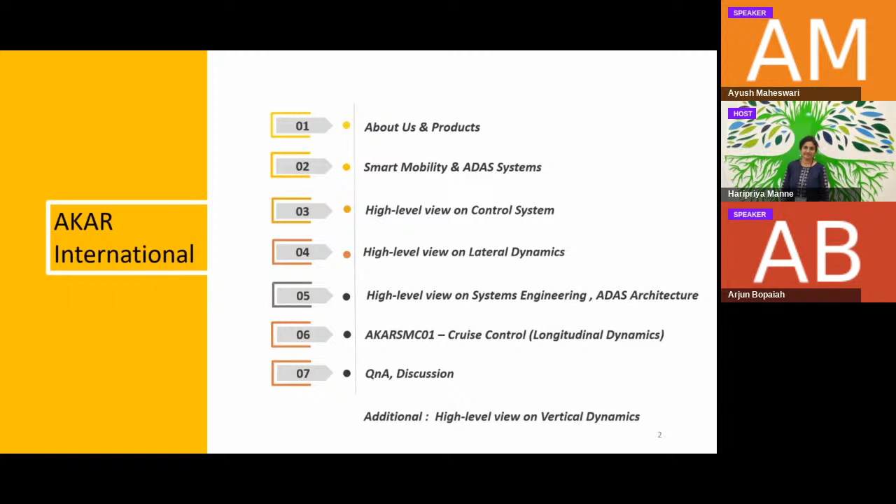In this webinar, we will first talk about our company, then about smart mobility and ADAS systems. Then I will give a high-level view on control systems, which is the core heart of designing ADAS algorithms, followed by a high-level view on lateral dynamics. Moving on, I will talk about system engineering and ADAS architecture, then showcase our product simulator on cruise control, which is already blended into our webinars and seminars. Then we will have discussion and open Q&A, and if time permits, I will also show a high-level view on vertical dynamics.

Talking about AKAR, it is a Singapore-based company co-founded in 2012. AKAR provides its products and services in two verticals. We started with fintech and software engineering as our first vertical, and our second vertical, started in 2017, is in the domain of automotive and smart mobility.

This webinar on smart mobility and ADAS system is presented by the AKAR team in collaboration with Andhra Pradesh State Skill Development Corporation, and I would like to thank them for giving us this platform to share our knowledge with all of you.

The presenters for today are me and Arjun. Unfortunately, Ram is not available today, so he will not be joining this seminar.

I did my master's in automotive mechatronics from Cranfield University. Earlier I worked with Honda R&D in the vehicle dynamics division, and after my master's I worked as a research and development staff member with Cranfield University. Arjun did his master's from Oxford Brookes University in automotive engineering, specializing in electric vehicles. Currently, we are both doing our professional doctorate in engineering in automotive systems design at Technical University Eindhoven, Netherlands.

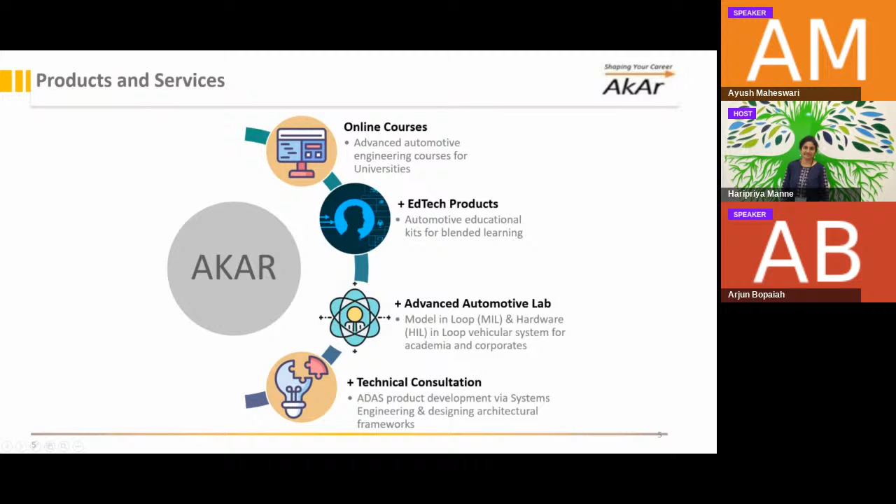This is one of our theoretical sample content of a 6-hour seminar where we focus upon control theory, vehicle dynamics, as well as ADAS development. We provide online courses covering basics starting from linear algebra and vibrations, eventually covering control theory and vehicle dynamics control, and finally ADAS architecture. This is our specific template for our online courses.

Along with our online courses, we are also developing simulators, which when blended with the online courses, allow you to perform various experiments based on what you are learning in parallel. Some of these experiments I will be presenting now.

Our first experiment is the cruise control system, developed with Unity Game Engine and MATLAB via wireless network. This system was developed by Arjun and Ram, and the subjects covered in this experimental bench are vehicle dynamics, control systems, state machines, and programming via C sharp, since the Unity Game Engine programming is done in C sharp.

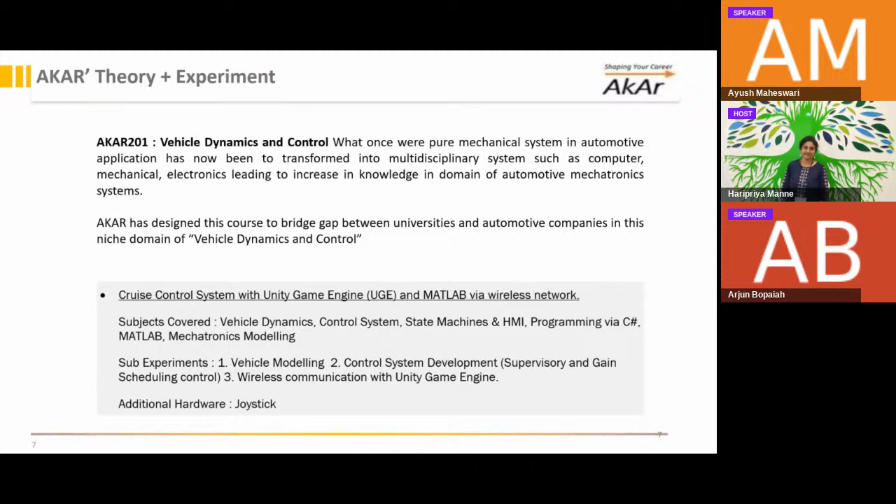Our other products include a vehicle trajectory controller, which you can control with a Logitech steering system. This is still in development, and again it is built using Unity Game Engine and MATLAB. Then we have our replay model for ride and handling control, covering ride comfort analysis, handling analysis, GUI interface development, and programming via MATLAB.

Our experiments and online courses try to provide specific knowledge in particular domains required for development of ADAS systems, whether you are working in a corporate setting or switching from university to corporate in the future.

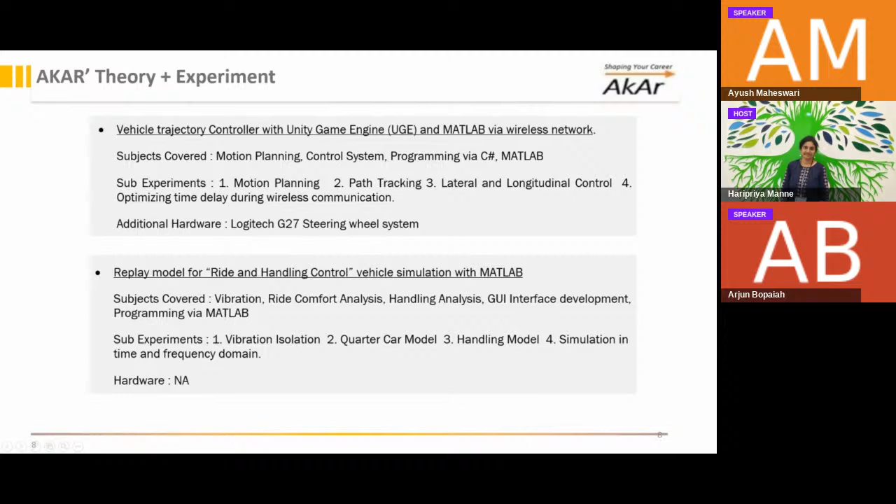In 2020, we collaborated with the Automotive Research Association of India, ARAI Academy, Ministry of Industries, and also collaborated with MathWorks India and ANSYS India this year. Our seminars this year were supported by MathWorks, and another seminar was supported by ANSYS.

Now I will start giving you a high-level idea of what smart mobility is and what exactly ADAS systems are.

Today, if we look at the bigger picture, many applications in today's world such as aerospace, robotics, automotive, and defense have developed smart systems attributed to the increasing power of computation. There has been quite an industrial revolution now when we say Industry 4.0, used interchangeably with the fourth industrial revolution, representing a new stage in the organization and control of the industrial value chain.

Industry 4.0 is comprised of cyber physical systems developed from multidisciplinary domains, and they form the basis of our smart machines. They use modern control systems, embedded software systems, Internet of Things, machine learning, etc.

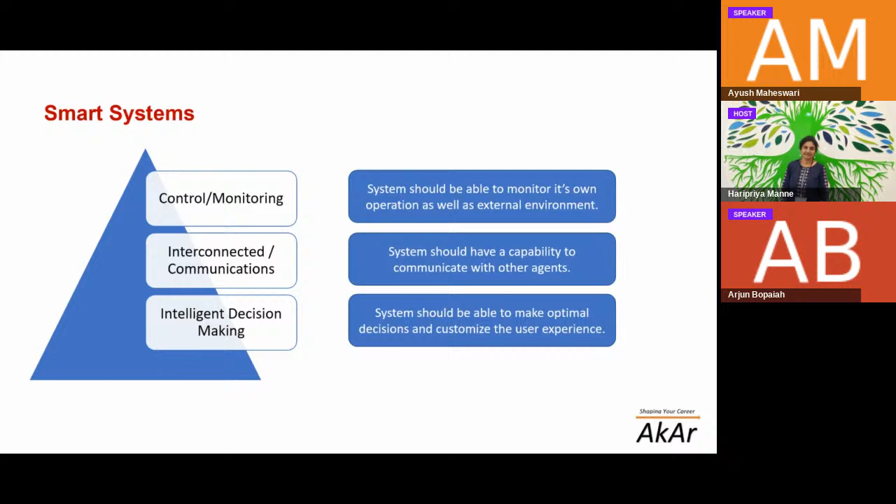A particular smart system can vary across various levels. A simple smart system can have just the control and monitoring attribute, while a fully developed smart system can have all three attributes. We try to use technology to embed all these attributes into a particular system.

Now, when we talk about automotive domain, smart systems in the automotive domain, we need to define the various levels. These levels are defined using SAE Taxonomy, defined by SAE J3016 level of driving automation. This chart offers more consumer-friendly terms and definitions for the levels frequently referred to by industry media. This infographic helps eliminate confusion and provides more clarity across the automotive community, and helps standardize the framework across global automotive companies, giving engineers and developers a benchmark and scope for their development.

So there are 6 levels of automation, starting from level 0 going till level 5. Here we have what the human can do at each level and what the intelligent vehicle controller can do, and how they optimize decision making between the human driver and the intelligent vehicle controller.

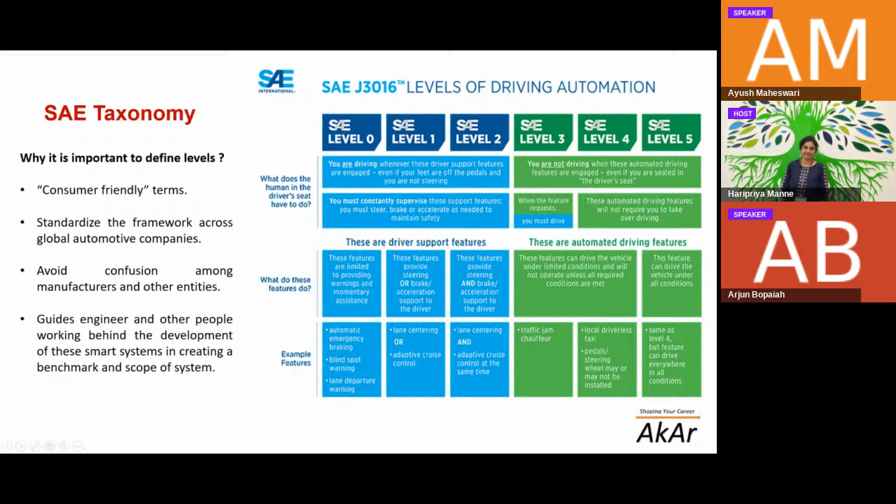Now, as we have seen what smart systems are and what the levels of complexity in these smart systems are, how should I decide at what particular point I need to stop? What should be my abstraction level? So there are various attributes.

One is the demographic and the customer base. What exactly is the requirement from the customer end? Then, what is the system developer's knowledge? If there is a lack of domain knowledge, you will not be able to develop a fully functional smart system. Then, the competitive positioning of a particular OEM which is designing this smart system, and of course, the country's infrastructure.

As we have seen earlier, a smart system also has an attribute of intelligent vehicle communication. So if we want our vehicle to communicate with infrastructure, then the country's infrastructure should also support it.

So here I have taken an example from agro tech. I have a particular conventional tractor and I want to make it a smart system. So first, I am putting a controller design into it and trying to perform maneuvering from the intelligent vehicle controller. It may be lane changing or cruise control, depending upon the requirement of the OEM. Then, on the third level, I also wanted to connect it with my smartphone.

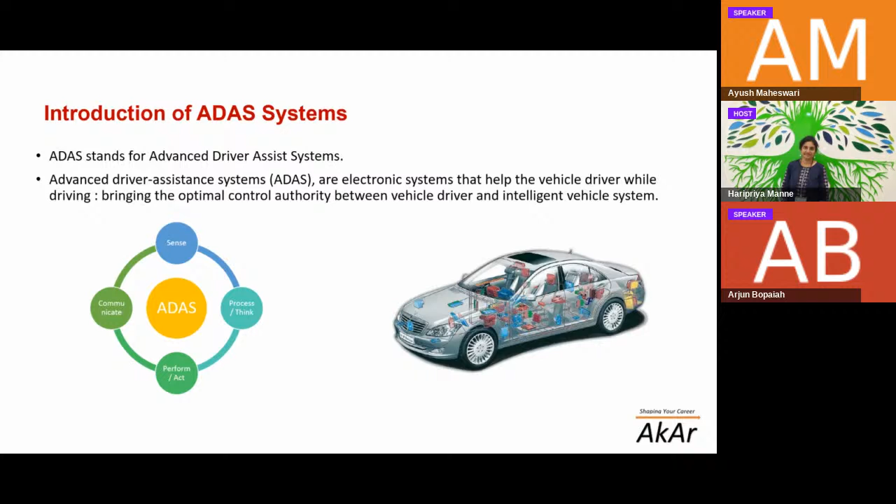When I talk about the need for ADAS systems today, or the need for smart mobility, we can see in India that a lot of work has been done by government on electrification and hybridization, and they aim to achieve electric vehicles on roads by 2030, and they're also developing the infrastructure for that. But right now, smart mobility is not much focused, though it will be a focus in the upcoming future.

Hence, we need to first find what is the need for ADAS systems. We can see that across the globe, there are peak hours spent in congestion during traffic, and the congestion index rate is also quite high. In India too, the traffic is not seamless in metro cities like Delhi or Mumbai, and smart mobility can help us achieve that.

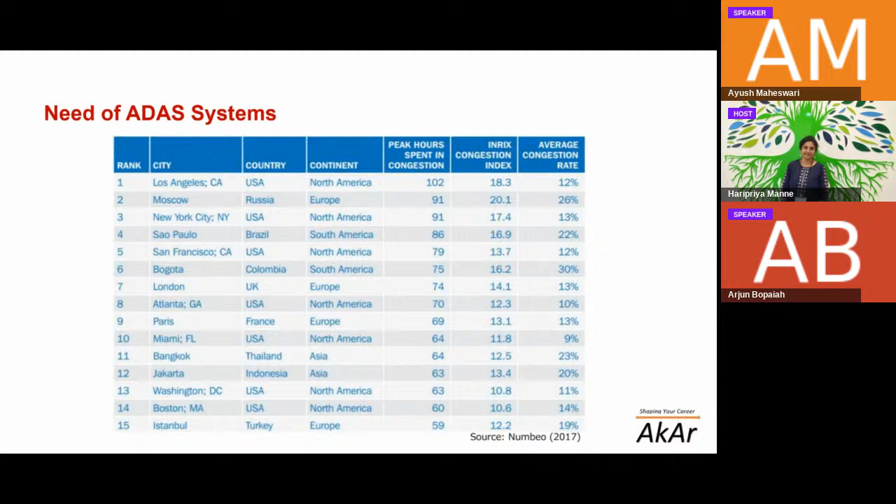Now I will talk about how OEMs are focusing upon ADAS technology across the globe. We know that driving is quite a complicated task, which requires significant level of expertise and experience. A lot of research focus is also put into making this fully autonomous vehicle navigate in complex and challenging driving scenarios.

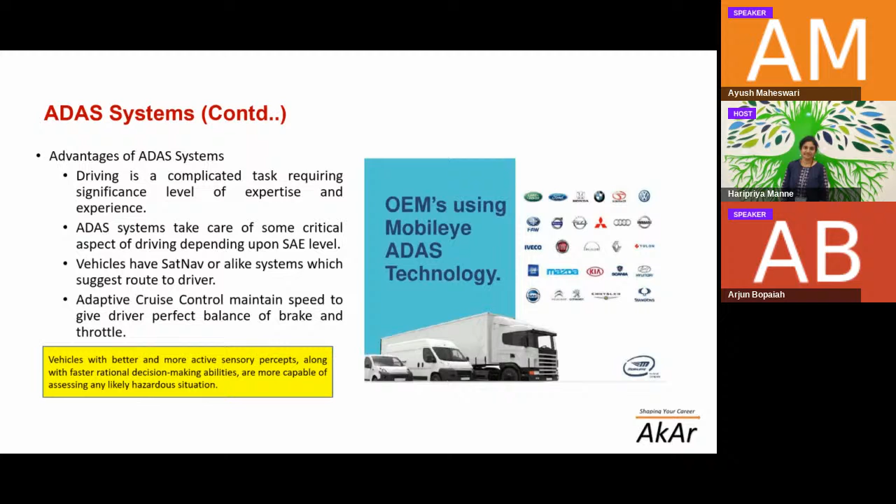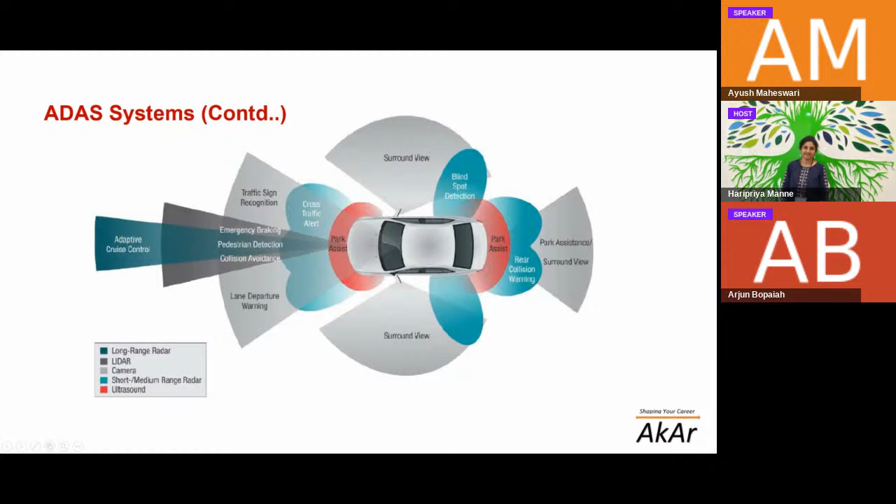First we need to understand the pipeline, the flow of the ADAS system architecture. The primary components in an ADAS system are sensors, processors, actuators, and software algorithms. Other features can of course be added over these components to make it a much more complex system, providing high comfort to the user.

Sensors will first perceive the external data. They will send that data to the software algorithm. Based on the software algorithm running on the processor, it will make some decision and send those commands to the actuator. Then the actuator will perform a particular action and will also inform the human driver. And then we can have secondary components like connectivity, where you can have vehicle to vehicle communication or vehicle to infrastructure communication.

You can store your data into the data cloud, and use that data further to study your driving statistics. And then there is middleware. If there are a lot of ADAS algorithms running in the system, and if they are dependent upon each other with high dependency between them, then middleware is used to basically perform a seamless integration between these software algorithms.

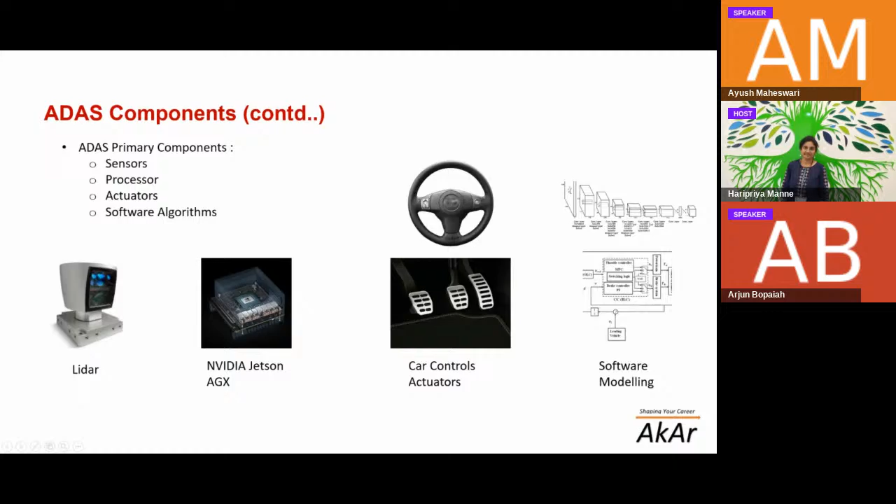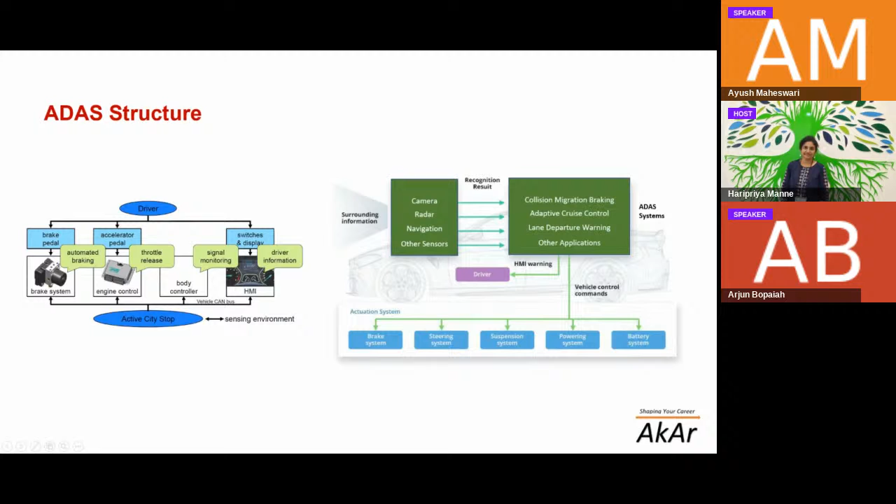When we talk about ADAS verticals, there are many verticals, and it's up to you which one you want to choose. In each vertical, you need multidisciplinary knowledge: vehicle dynamics and control, power electronics, computer vision and image processing, machine learning, deep learning, embedded systems, human-machine interface, software architecture, and some other verticals. It's up to you which domain you want to enter. Eventually, when working in a company, you will work in an integrated environment between these verticals.

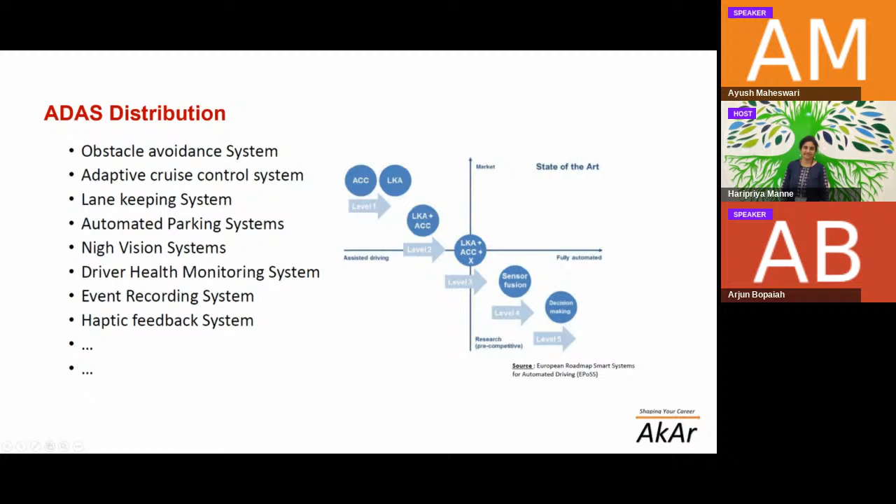Now I will give a quick recap. We started with Industry 4.0 smart systems, then moved towards ADAS systems, which are smart in the automotive world, and talked about the importance of ADAS systems. Now I will talk about the particular domains required to have good knowledge of ADAS systems so that you have the capability to develop ADAS algorithms.

If we talk about monitoring, which is one of the important attributes of a smart system, we talk about control engineering. Control engineering helps in monitoring my reference input, and it not only maintains the reference variable at the required values, but also follows its changes.

For example, let's talk about cruise control, a much simpler example. I want my vehicle to drive at a constant speed of 70 km/h on the highway. So I can give authority to the intelligent vehicle controller where my reference input will go as 70 kmph, and based on my control algorithm, it will try to maintain that speed on the highway until a human takes back control. These control algorithms are further embedded in microprocessors and can provide better control and automation.

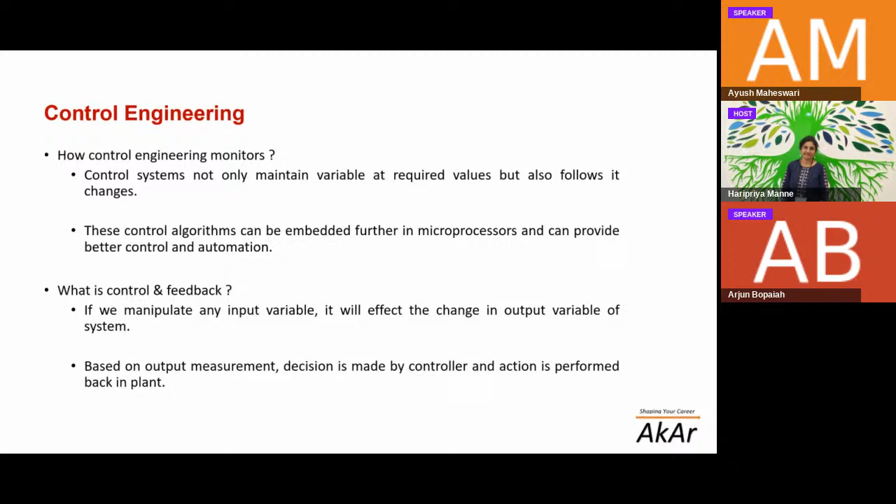Moving towards control engineering, there are two major divisions: classical and modern, and they have direct implications on control engineering applications. In classical control theory, my scope is limited to single input and single output design systems, and the system analysis is carried out in the time domain using differential equations and in the complex S domain with Laplace transform. If you are from a mechanical background and doing your bachelor's, I suppose you would not have studied much control engineering. I will cover a high-level view of control engineering so that you can understand its important aspects. Since this is a webinar, I can't go into in-depth detail. PID closed loop is one of the common classical control theory architectures.

Now, when we talk about modern control theory, we can deal with multiple input and multiple output systems. The systems are represented in terms of time domain, so I have various ordinary differential equations which I decompose into first-order ordinary differential equations and write my system in the state space analysis using state variables. All the systems here can have a multiple input and multiple output design. Further in modern control theory, you have various subdivisions: nonlinear control theory, multivariable control theory, adaptive control theory, and robust control theories.

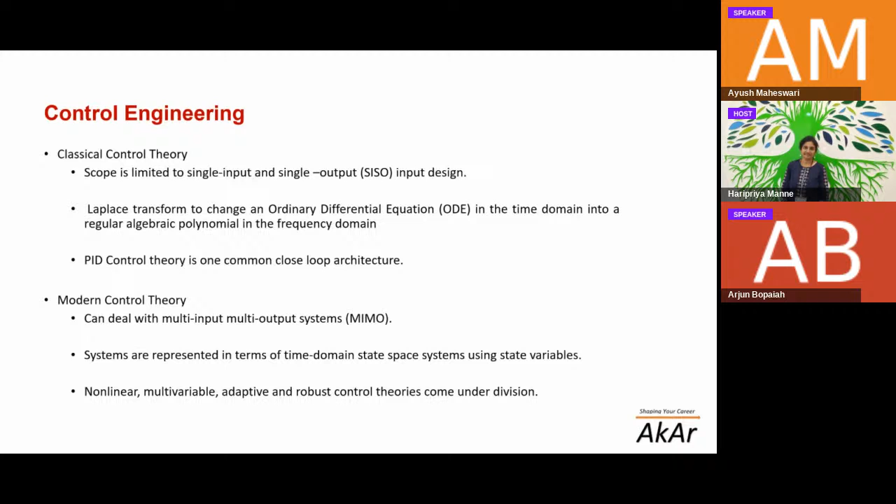So one of the most important things - some of you in the audience will be students who have participated in Baja or Formula Student teams. One of the most important weapons for race car teams is information. The more information a vehicle can gather and process, the better judgment and decision a driver can make. So university racing teams can use the concept of vehicle dynamics and control for their testing and data acquisition process.

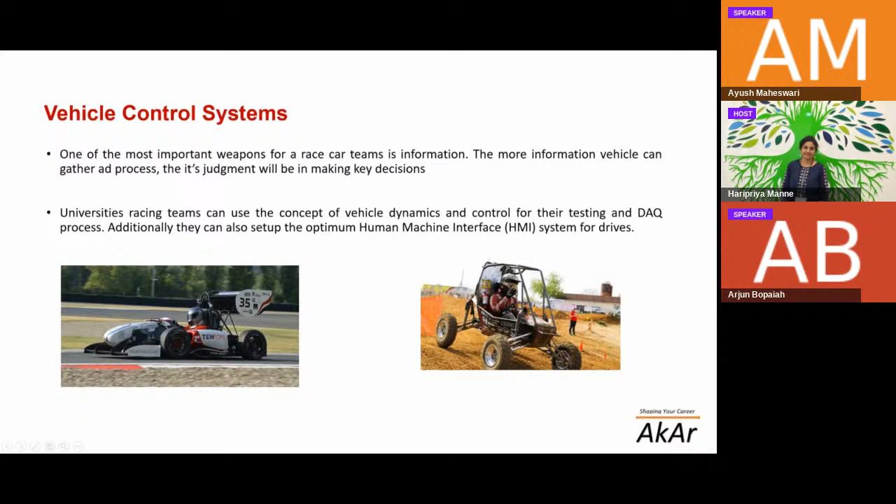With the better development of processor boards, they are now economical also. You can buy an NVIDIA processor board and also set up a very nice optimum human machine interface for the drivers.

So that was the control engineering aspect, which we were talking about in the monitoring part. Now we will talk about the plant model - what we are trying to control. We are trying to control a vehicle or plant, and to understand the vehicle or plant, we need to understand the vehicle dynamics. Vehicle dynamics plays quite a major role in development of these advanced driver assist systems.

It is further defined into three sub-levels: vertical dynamics, longitudinal, and lateral. If I see from a driver or layman point of view, he is not an engineer, so the terms we use are ride comfort. For example, if you are driving over a lot of perturbations on the road, then your comfort, depending upon your vehicle suspension design, will vary. So ride comfort is controlled by the vertical dynamics part. I will not talk about motion sickness because that is a bit out of the scope of this webinar.

Then we talk about longitudinal dynamics - the cruise control part and the adaptive cruise control part. And the lateral dynamics when we talk about maneuvering, handling, rollover, and when we are driving the vehicle at a very high speed, how stable is my vehicle. So these are some important terms you need to consider while designing the vehicle dynamics domain.

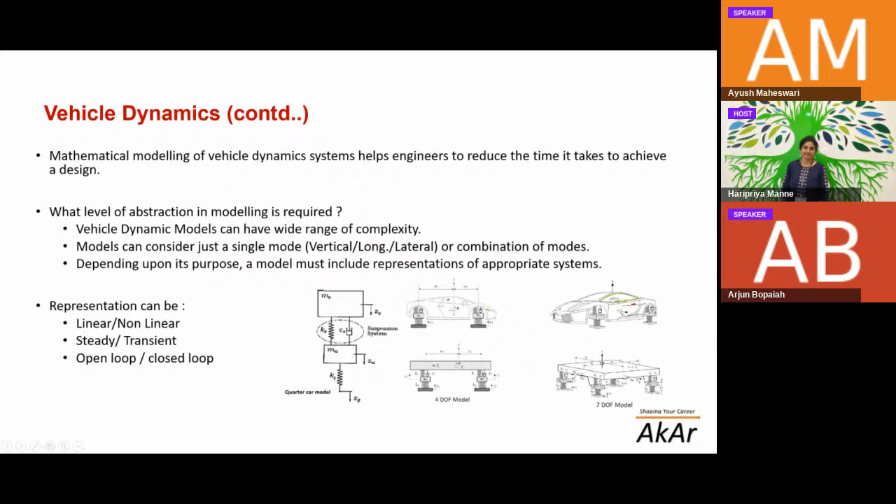Further, the representations can be linear or non-linear, steady or transient, and open loop or closed loop. So eventually my whole ADAS system is dependent upon my vehicle modeling and control theory.

Eventually you will see that if I calculate the stakeholder map of my ADAS system, it is affecting everyone in the business: the customer, the OEM, the proving ground testing engineer, validation engineers, simulation engineers, architects, and the configuration manager or software developer or team designing the middleware. So this ADAS system engine needs to be designed very carefully, accurately, and properly. Then only you will be able to satisfy all the stakeholders.

So this was this session of smart mobility and ADAS system.

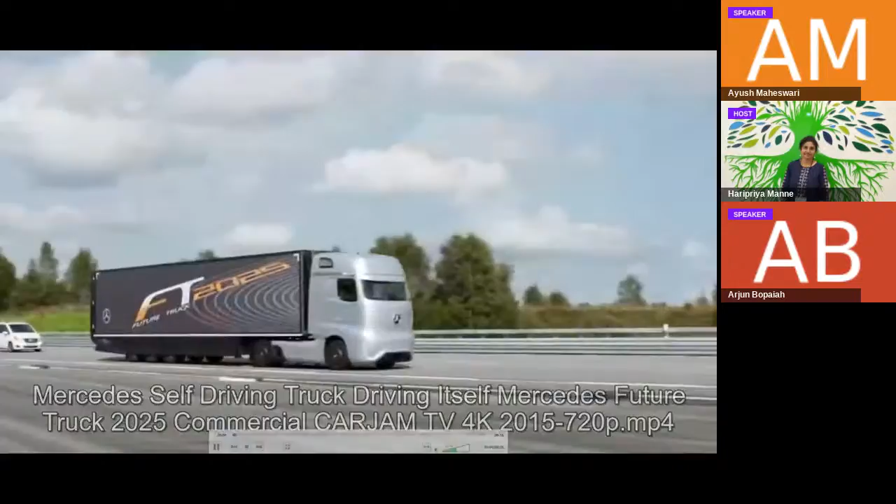So this is an example from Mercedes that you can see the level of automation over here.

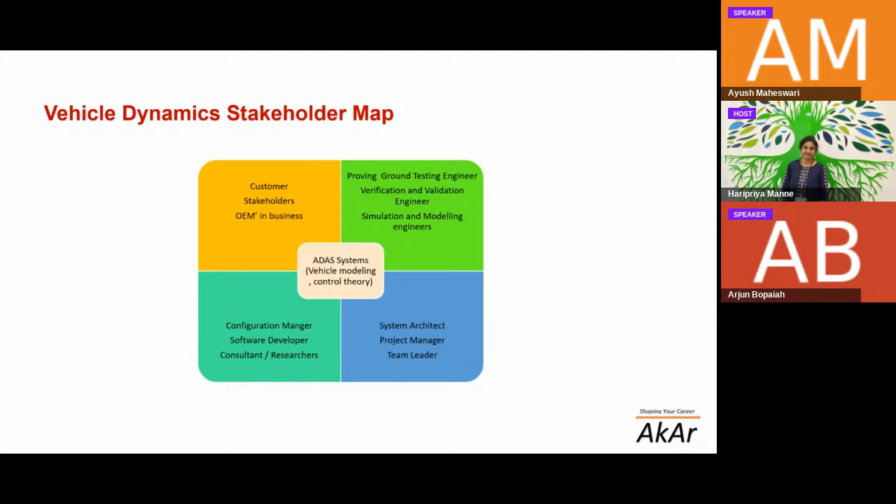So now I will be covering the high level view of control system—what exactly is a control system and how you can use it, how you can increase your knowledge in this domain. I will also be sharing some references. So let's study now the high level view on control theory.

As we have earlier discussed, a control system is an interconnection of components aimed to achieve a desired state system response, and classical control theory is used for single input single output systems, where the input output relationship represents the cause and effect relationship of the process.

So we have different types of control loops: one is open loop and second is closed loop. Open loop you can see in daily life examples like an electric dryer or washing machine, where you set up a particular timing and the process is done, and once that timer is over, irrespective of whatever state the cloth is in—whether it is dried as you wanted or not—it will finish. So that is an example of an open loop.

In the closed loop, as I shared earlier, we take the measurement from the sensors from the output, do the comparison with respect to the desired output response, and then my controller performs the control action. So the measure of output is known as a feedback signal, and the difference is known as error, which goes into the control algorithm, and the objective is to reduce the error.

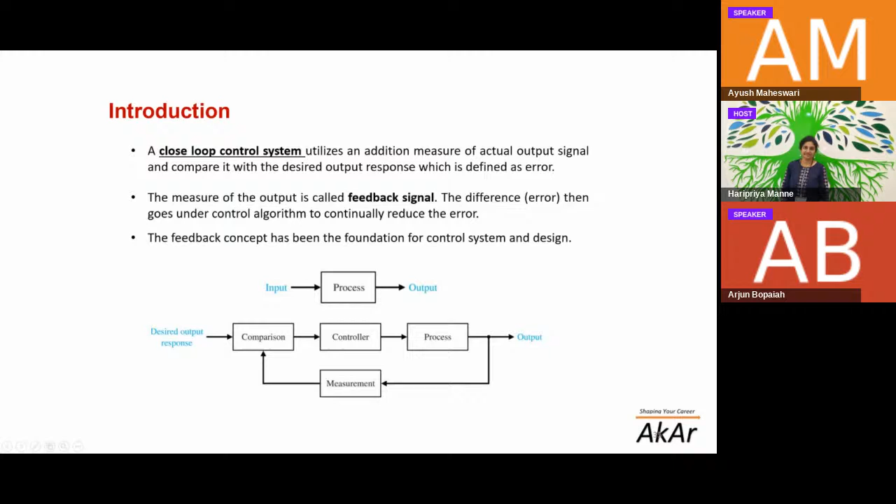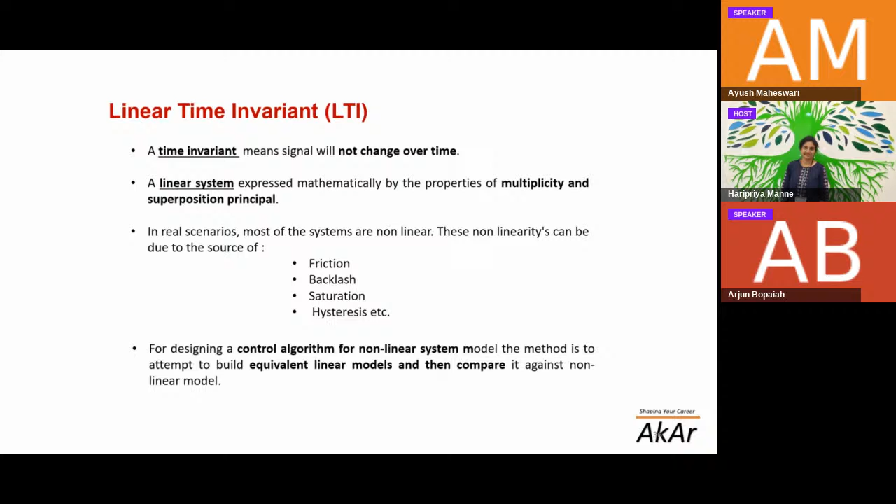In real scenarios, most systems are nonlinear, and the sources for the nonlinearities can be friction, backlash, saturation, or hysteresis. For designing the control algorithm for a nonlinear system, the method is to build an equivalent linear model. Arjun will go into detail when discussing linearization in our simulator, where the nonlinear attribute came from the aerodynamic equation, which we then linearized. So nonlinear to linear modeling is quite important.

Now, when I talk about control theory, how should I represent my system? My system is represented using a transfer function. Transfer function is basically used to represent the ratio between the Laplace transform of the output and the Laplace transform of the input.

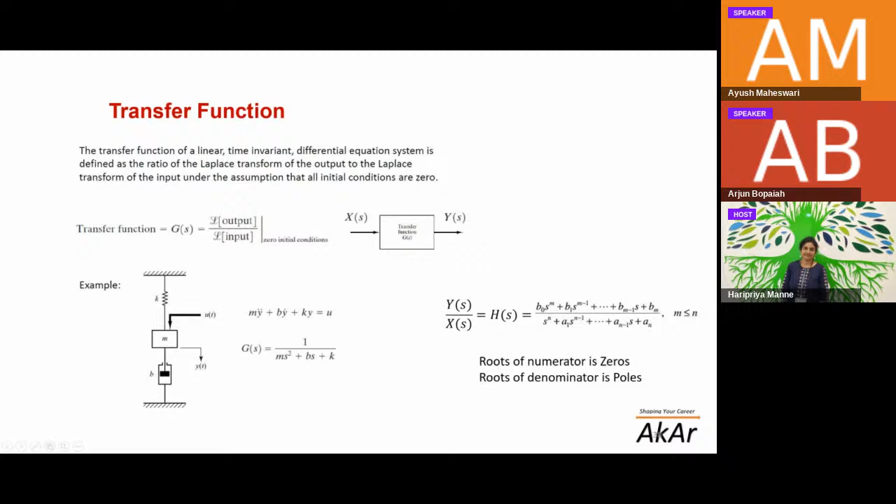If I go in detail, S is defined by sigma plus j omega, where sigma is my real value and j is my imaginary part, iota, and omega is on the y-axis, my imaginary axis. A particular transfer function is represented this way, and the roots of the numerator are known as zeros, and the roots of the denominator are known as poles.

If I further go into modern control theory, then instead of changing domains to avoid the complexity of the time domain, we convert the differential equations into a system of lower order time domain. So if I have a second order or an n-order differential equation, I can decompose that into lower order, first order differential equations.

It is important to select the set of state variables for the same. State variables form the smallest set of independent variables. So you can write your plant in terms of transfer function, or you can write it in terms of state space. State space is given by x dot equal to Ax plus Bu, and y equal to Cx plus Du.

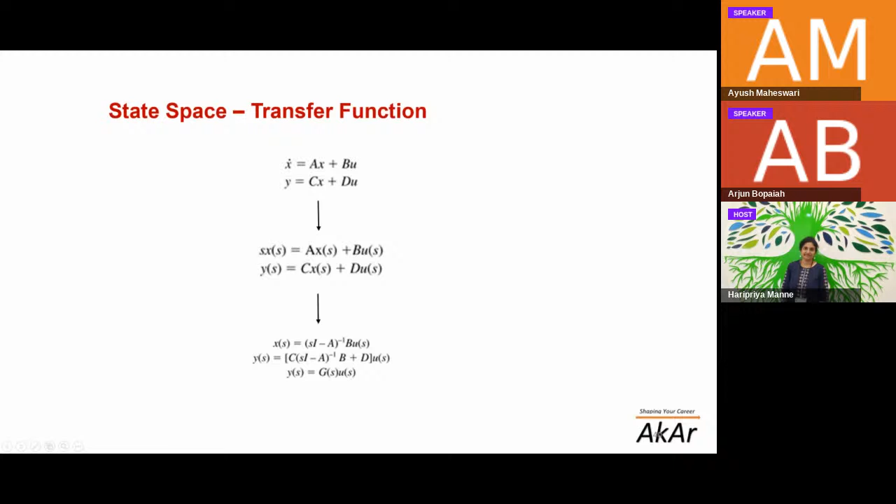So G of S, my transfer function, is given by C into (SI minus A) inverse into B, plus D. The roots of the denominator are known as poles, which have a very important characteristic in defining the stability of a system. The eigenvalues of A, which is my system matrix, are the poles of my transfer function.

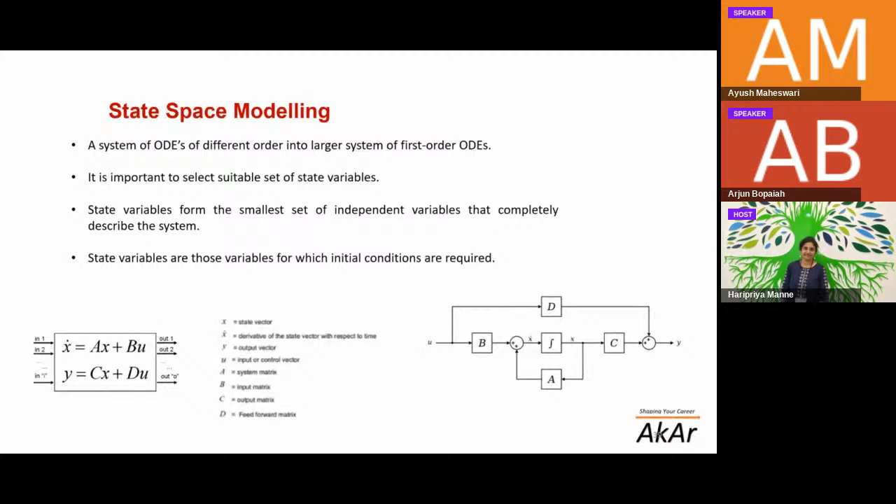In the seminar, which AKAR takes as 9-hour seminars, we talk about how this derivation works and how you can actually see it in real-time scenarios. Because of the lack of time here, I am just giving you a high-level perspective.

We have a rise time, a peak time, the settling minimum, settling max, and then the settling time. So how much settling time it takes to achieve my desired response is defined by the controller characteristics.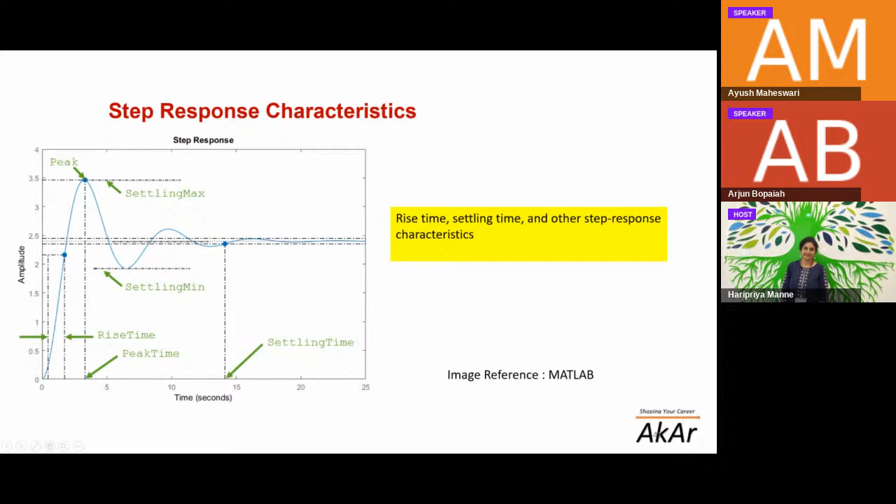When I talk about the step response, it helps tell whether my system is stable or unstable in the time domain. For example, here this is a second order differential equation which has been converted to the transfer function, and you can see that my system is eventually getting dampened out, so my system is getting stable.

For example, if my vehicle is traveling on a particular surface, it will eventually get stable. But in the unstable system, my system is growing unboundedly, so this is an unstable system.

You can see here I have a negative sign in front of damping, which is not possible. But if you try to understand it mathematically, what my damper does is control and dissipate heat. But if my damper has a negative coefficient, it will give energy into the system, which will make my system unstable and grow unboundedly.

You can realize this when you think of scenarios from the automotive or aerospace domain. Specifically from aerospace, there are a lot of examples of crashes where the system has gone unstable. If I remove my damping part, I will be left with just the imaginary axis of the Laplace transform, which is the Fourier transform. So the Laplace transform considers real as well as the imaginary axis, and the Fourier transform talks about the imaginary axis. This is a marginally stable system, which you would have studied in simple harmonic motion during high school.

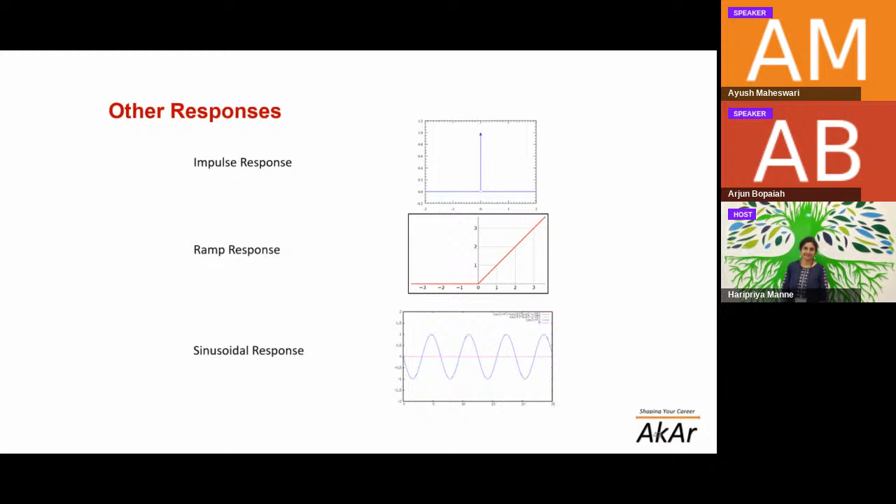From the handling perspective, your input is the steering wheel, and you can give a sinusoidal steering input to see how stable your car is during handling at high speeds. These control methodologies help you define whether your system is stable or unstable. Then there is the Bode plot, which is quite important to study, as it tells you how your system will perform in steady state response across the frequency spectrum.

So my transfer function is given by 1 upon ms squared plus cs plus k, single over here as a spring mass damper system, and the magnitude of the complex number tells me the gain. For example, if my input is 5 into the system, and I multiply it with a gain of 2, I will get 10 — simple multiplication. Similarly, this value tells you the gain you will achieve at a particular frequency, and the phasor angle tells you the phase lag between the input and the output.

So this is a typical diagram of how a Bode plot looks like, and it tells you across the whole frequency spectrum how my system is going to behave. In the lower frequency spectrum, input is almost equal to output. In the mid frequency regime, I'm getting a bit of a higher gain, sort of a peak, and then in the higher frequency it is attenuated.

And if you see an example from the spring mass damper system, over here, example.

To explain, I will show you a bit more of a demonstration from here. If I have a spring mass damper system, since we are talking about Bode plot and steady state response, over here is my input. You are controlling this, and I want to see the change in my position when I am changing the input.

So when my frequency is low, when you are just changing the signal very slowly, then the gain will also be about the same — you can see that from here. In the mid frequency region, if I increase my frequency, the system will actually have a higher gain, so it will go more than this. And in the higher frequency regime, if I give a very high frequency input, then my system will not change, my mass will not move. There are a lot of examples on YouTube from MIT where you can actually observe this phenomenon.

So this is what the Bode plot helps us tell. That's why the half power bandwidth is the point after which my whole output is getting attenuated, which is approximately -3 decibel, or the cutoff frequency. The bandwidth concept also comes from here.

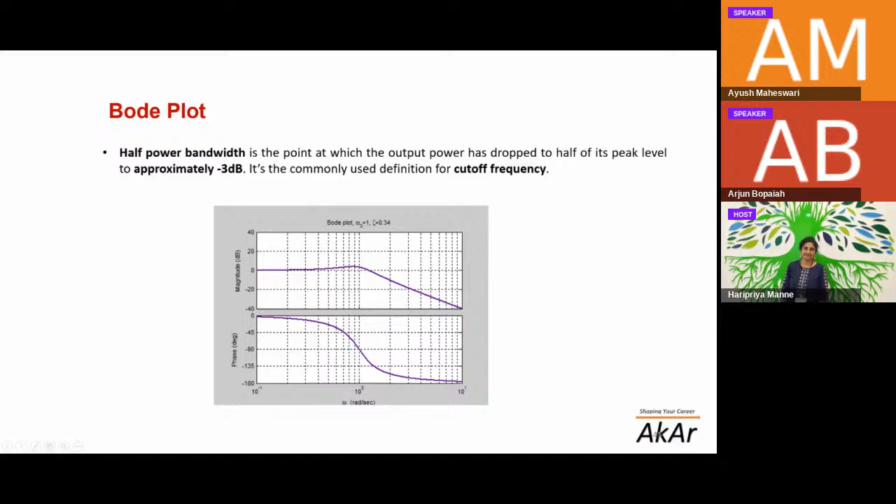So there are different particular terms which help in defining this: sensitivity and complementary sensitivity. Sensitivity takes care of the tracking and the disturbance rejection, and the complementary sensitivity looks after the noise attenuation.

Of course, if you attend our seminars, we will actually do the derivation of how we have achieved that. But if you still want to understand, you can get a complete understanding from the book mathematically, or you can see the video of Steven Brunton's lecture on the control bootcamp series. It's quite a good series, and I will request you guys to watch this series to understand these concepts. I'm just giving a high level overview.

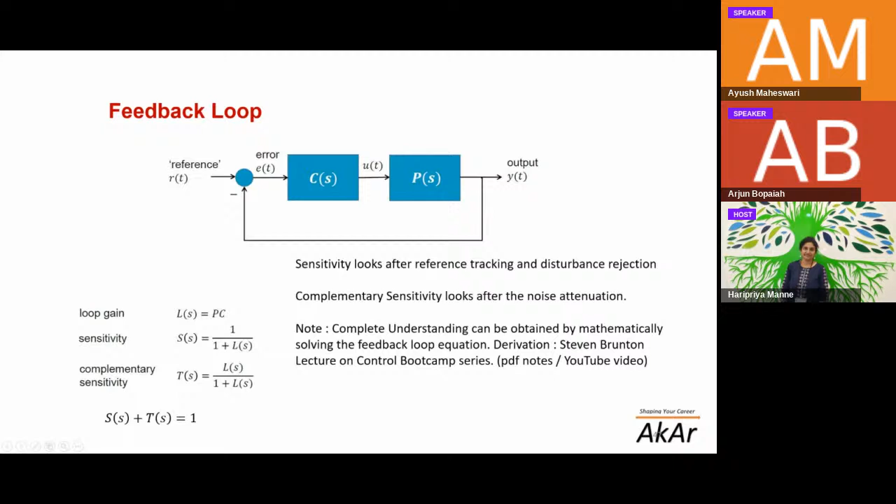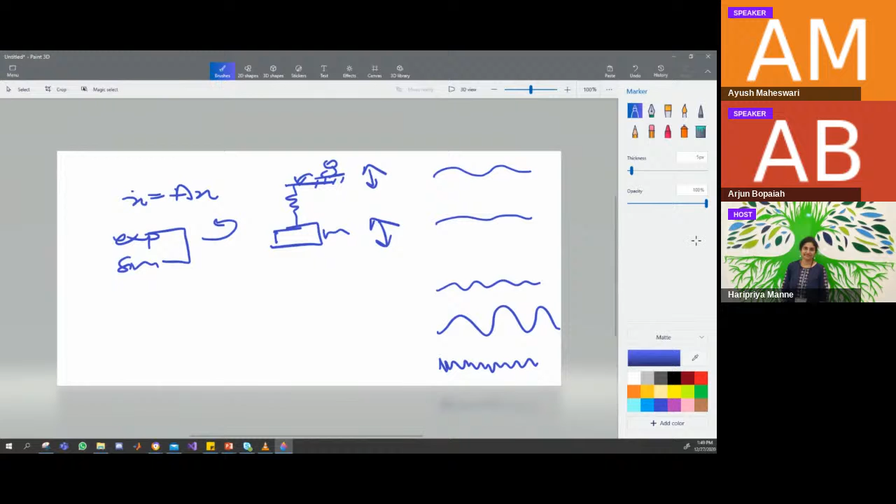Now, the pole location I was talking about in the transfer function helps me define how my system will behave. For a first order differential equation, something like this, if I use my exponential or sine and take the derivatives, they are recursive derivatives. That's why these are the solutions for this differential equation. That's how we achieve the concept of bounded and unbounded cases.

So over here you can see it is an envelope of exponential and sinusoids, and this is just a sinusoid — that's why we define real and imaginary axis. When we talk about just the steady state response in a Bode plot, we only talk about the imaginary axis. So the stability of linear systems can be determined from the location of the poles.

So these are the roots of the characteristic equation of the poles, and your zeta value will define whether your pole will lie as a real pole or a pole at origin, in the right half plane or left half plane. The preferred topics to study from the references I'll share later are these sorts of stabilities, which will help you get a good idea.

The best reference to study control systems is Professor Gopal from NPTEL. On YouTube you will find his lectures, and they are really good. I'd prefer you guys study those lectures in detail. Steve Brunton covers it again at a high level. I am covering it at a very abstract level, he covers more of an intermediate level, and Professor Gopal's lectures go in depth into the mathematics.

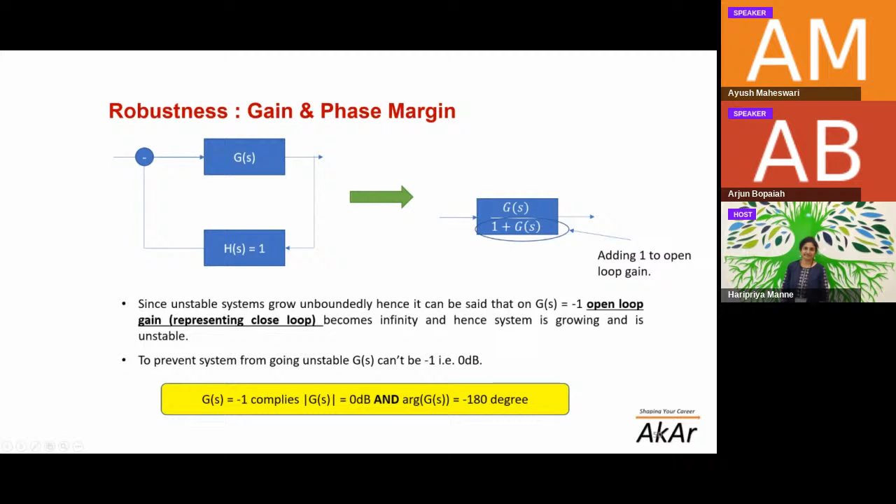Similarly, we calculate our robustness using the gain margin and phase margin. If you see, my closed loop transfer function is G(s) over 1 plus G(s). If I put G(s) equal to -1, my system will go to infinity. So at -1, my system is getting unstable. That's how I define my gain margin and phase margin.

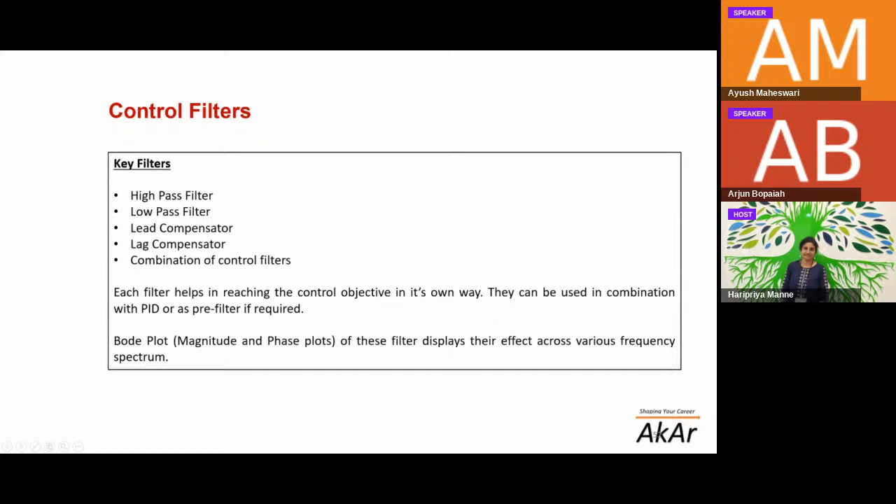Then there are various control filters you can study apart from PID: high pass, low pass, lead compensator, lag compensator, or combinations of these filters. These filters come in the GC part, and they help you achieve your desired state response. Similarly, you can use a PID controller.

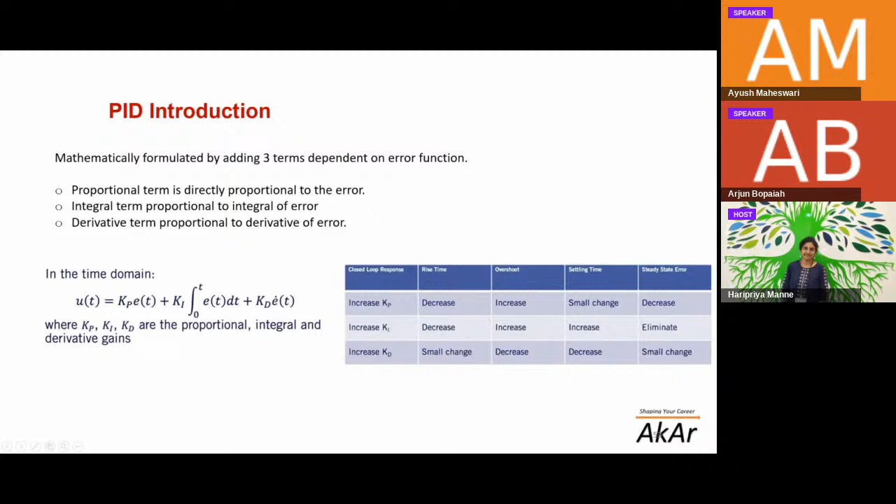It has a proportional term which is directly proportional to the error. The integral term takes the integral of the error, the past time, and the derivative takes the derivative of the error, which is a future part. By changing KP, KI, KD, you can change the rise time, overshoot, settling time, and the step response characteristics. This is a particular example I've taken from a self-driving car optimization course.

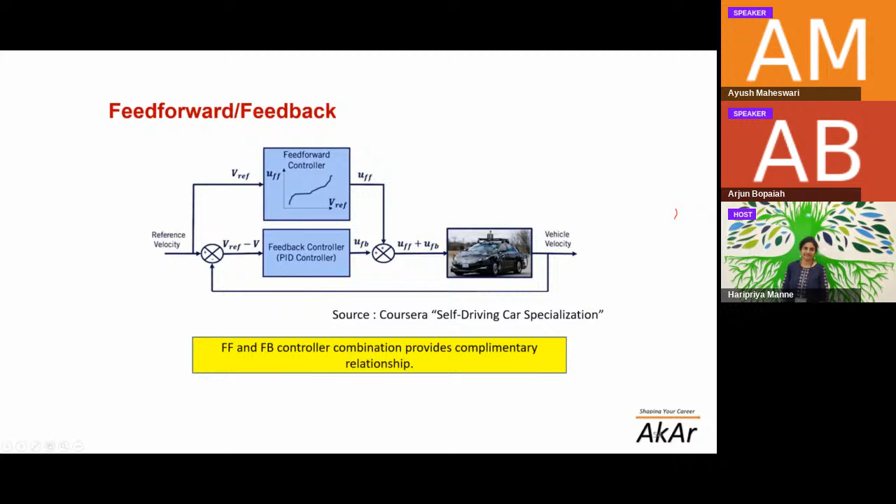In summary, these are the specific decision-making parameters you need to take care of while designing the control algorithm. The reference lectures are: Brian Douglas YouTube lecture series, Steve Brunton YouTube lecture series, MIT OpenCourseWare is quite good, and Modern Control Engineering by Ogata. These are quite good books if you want to study control engineering.

It takes time and patience. You have to study a lot of mathematics. Fundamentals of mathematics are very important to perform an in-depth study, because control systems are technically all mathematics, and that's where the magic happens. These online seminars and YouTube series can only guide you unless you either do the experiment yourself or take academic lectures from a university.

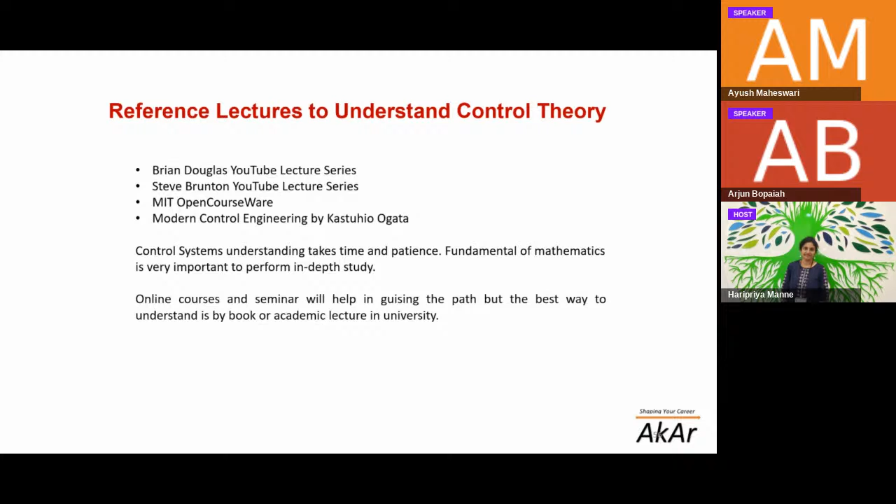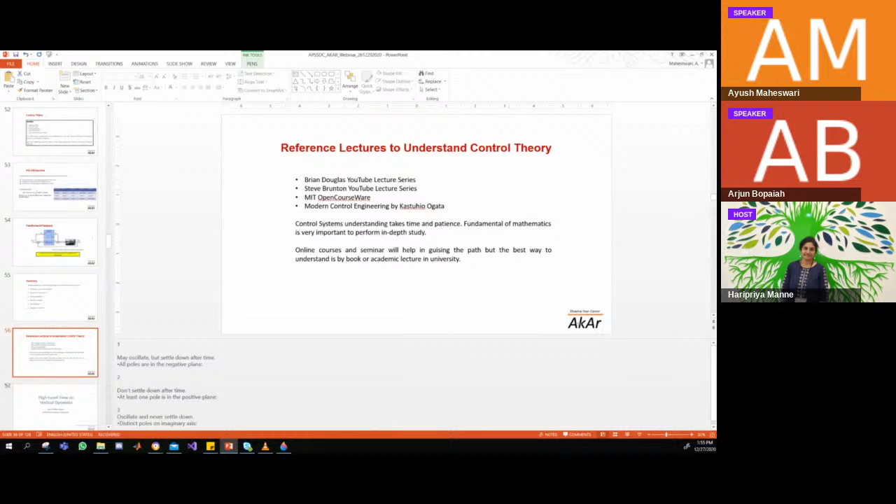Yeah, Ayush, can you stop sharing so that I can share? Yeah. Can you see my screen? Yeah, we can see your screen here.

Okay, thank you Ayush for the theory. Now those theories need to be applied in practical terms, and the best way to learn is to do a project. What we've done is try to implement all this knowledge into designing one part of the ADAS system, which is cruise control, found in today's vehicles. This was developed by myself, Ram, and Ayush.

What exactly we've done is, we've seen that in cruise control, the steering wheel has a number of options to set or operate the cruise control, basically to activate it. There are a number of buttons such as the on button, set button, resume, and cancel. So what exactly is the basic operation of cruise control?

When you're driving on the highway and you want to stop giving accelerator pedal and brake pedal, and you want the system or the vehicle to take control so that you're peacefully sitting in the driver's seat just using the steering wheel to maneuver, the system is controlling the speed or basically maintaining a constant speed when you're going on the highway.

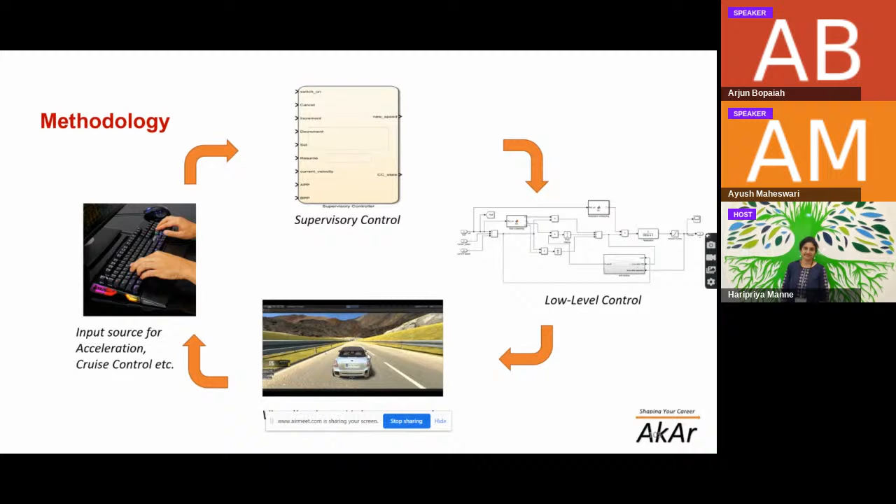So this was a simple methodology we've used. Now, what exactly is supervisory control? So you are driving the vehicle - that's normal driving, human is driving. But when the system is driving the vehicle or taking control, there needs to be a distinction between the person driving the vehicle and the system driving the vehicle. So supervisory control is a controller at a very high level which indicates who is driving the vehicle, in simple layman terms.

So to make this applicable in the software or in your understanding, there's a topic called state machines, which other people also call state flow. Basically it's nothing but going from one state to another state. I'll give you an example in the next slide about it.

Also, Ayush mentioned something about the architecture - you can have n number of architectures for this, but two most important things you need to take care of: try to make the architecture simple so it solves your purpose, and secondly, it should also be able to decode or debug the error you're having. If you make your architecture too complicated with a lot of inputs and outputs going here and there, it becomes very difficult to track what exactly is going on or going wrong when you're testing it. So what we've done is we've just made one supervisory controller.

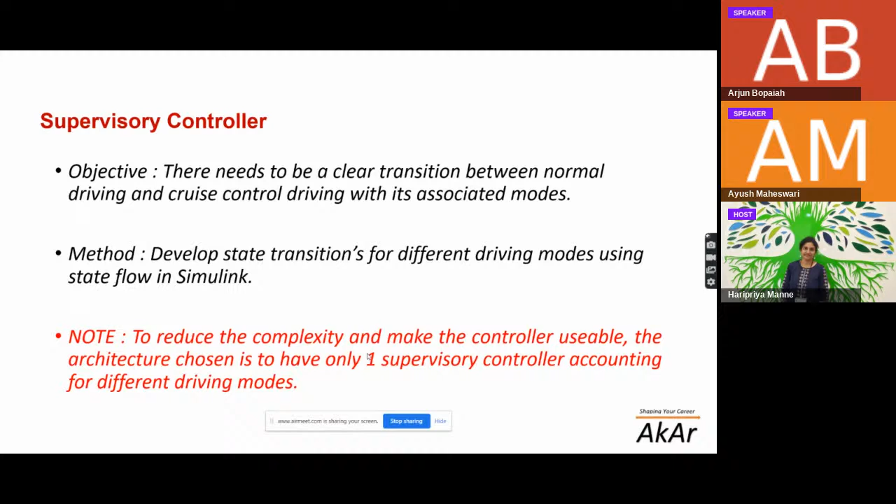You can have multiple, and basically this single supervisory controller is sufficient to basically handle the entire cruise control algorithm which is working on the system.

Going into much detail, what we do is basically take the input. So these are the inputs from the button. In the steering wheel, whenever you press the button, switch on, cancel, increment, resume, whatever it is, this input will be going in the form of binary numbers, zeros or one, into the system.

And you'll be getting a suitable output from it. Now, if I go in depth to what the supervisory controller is actually doing, or what you call the state flow state machine is, basically you are there in an initial state and you press a button, for example A. So this indicates it to go to another state which is called switch on.

Now the cruise control is running in your background, but you want your system to get actually activated and you want your cruise control to take over the control. So as a designer, what I say is I would like to only use my cruise control while I'm on the highways, that is, it should have a speed of at least 50 km per hour. So once this condition is satisfied, if I press the set button, it will come to the cruise control running state wherein I don't have to press anything. It is the system which is going to take control and do the necessary action. So this is a simple state flow which happens inside, and multiple things can be linked to it.

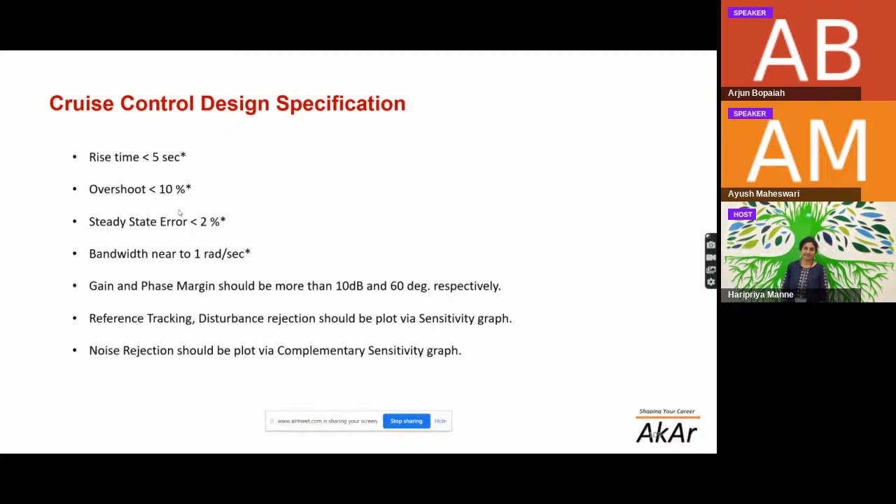So we've said, for example, the rise time should be less than 5 seconds, etc. We said for our development and optimum condition, based on literature or the papers what we've got, this should be the condition which our controller should be meeting. So once you have set your requirements, then you start coming and designing the controller.

So how do we do it? Very simple. We've got an engine which is represented here, and we've got a non-linear model. So the input to the engine is nothing but the throttle. What we'll be getting out from the engine will be the tractive force, which will be going to the wheels, and that would be coming as a velocity to the vehicle.

So why exactly have we mentioned it as non-linear? Because due to aerodynamic drag, which is half rho Cd A V square, it becomes non-linear. Also, since we don't have a proper engine map which says torque versus speed or power versus speed, we don't have that. So what best can you do with the limited amount of information you have? We say, okay fine, we know the maximum torque of the vehicle, we know the maximum RPM of the vehicle, and we know the ratio of how it is split. So we define a torque characteristic curve here. Even this has a square term, so again this also becomes non-linear.

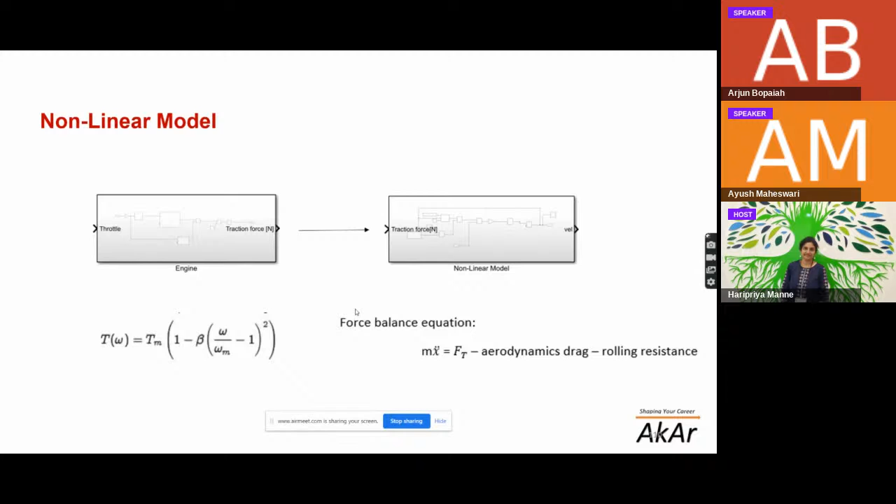So this entire system what we've made, it is in time domain, and it is going to work for the controller whatever you design. That's fine, but solving the system in time domain itself is not the solution. You even need to account for the different situations which is happening, which can be represented in the form of frequency domain. So when we go next, as it is a non-linear system, and frequency analysis has to be done for linear systems, now you said that from 50 kilometers onwards, I'm going to set my cruise control and I'm going to work.

So there is a certain range. Of course, my top speed of the vehicle will be maximum, for example, 110 kilometer per hour or 120 kilometer per hour. Beyond that, nor my vehicle can go, nor do I want my vehicle to go. So you set a boundary there.

So for all those velocities, what you do is take it as equilibrium points, and using Taylor series expansion, you linearize your equation which is described here for that particular velocity. So basically you're getting a single value of V. So for 50 you'll have one value, for 55, for 60, 65, and so on. So basically you're linearizing for particular velocities and then analyzing the function in the form of a transfer function.

So whatever transfer function you've got after performing a Taylor series expansion, for this you do all those things which were told in previous slides regarding Bode plot, and then you try to meet all the conditions which were defined in the previous slide regarding rise time, settling time, and sensitivity. So this is the way the frequency analysis has to be done.

Now even your frequency analysis methodology or the flow is good. I mean you have a brief understanding of how this has to be done. What next? See, the controller is something which is not working in the vehicle continuously.

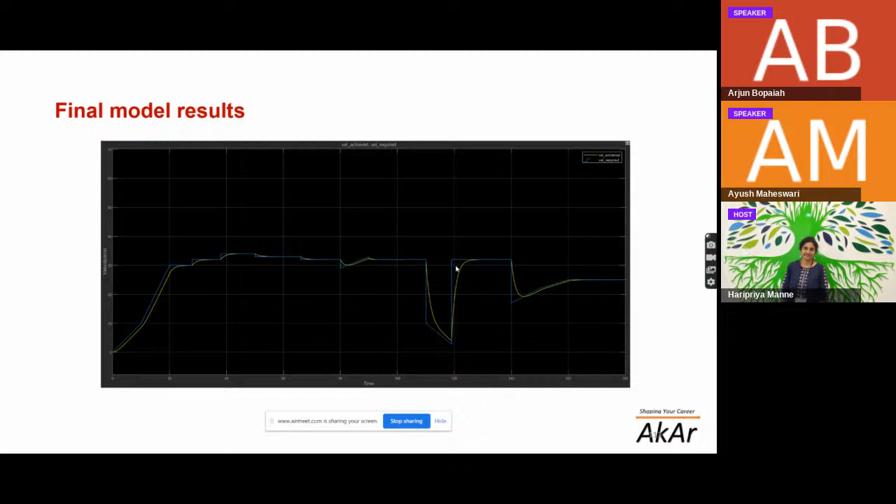And now what I would like to do is visualize how exactly, in an actual environment or an actual moving scenario, this is going to function, which we've modeled using Unity Game Engine. I would request Ayush to take control from here, and he will explain you about Unity Game Engine.

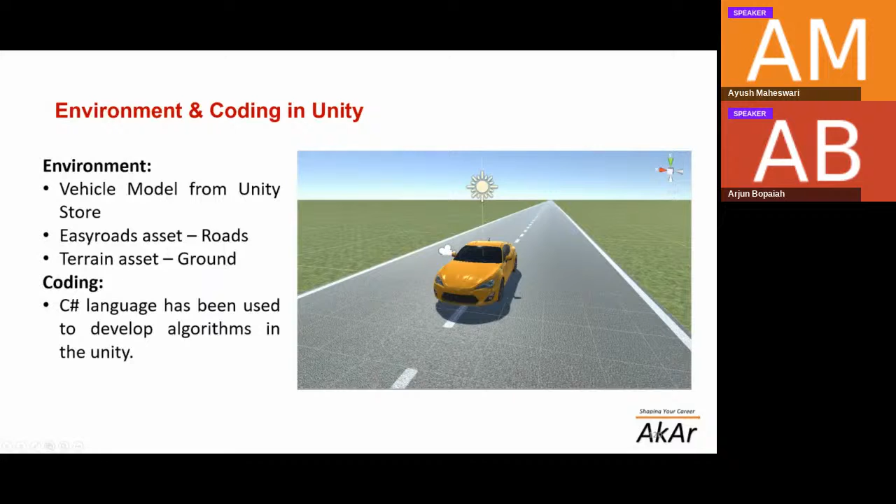This is somewhat what the environment looks like in the Unity game engine, and these are the mode selections we have used for the keyboard systems. So this was one of our products, and now I will show you exactly how our product looks like.

While using our products, you can use various experimental benches, and you can change your controller. We have made it more open source, so you can see how things are happening. This is the demo video showing the working model of the cruise control system that has been developed. Let's get started.

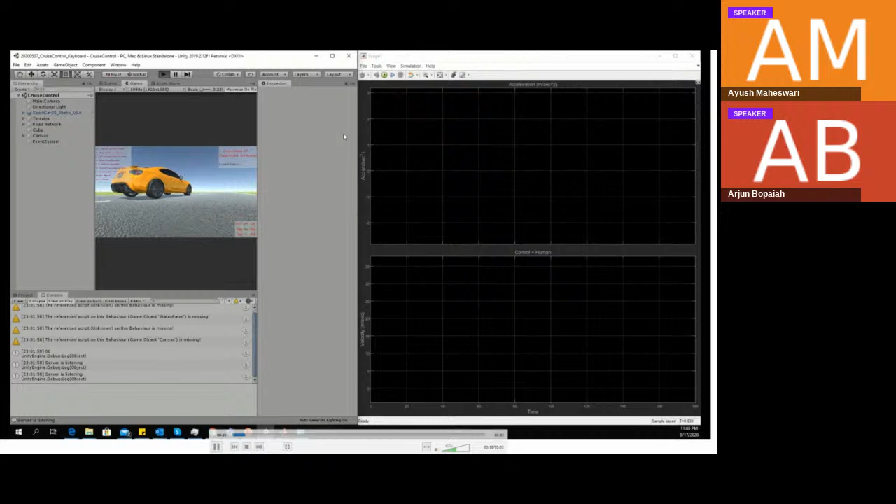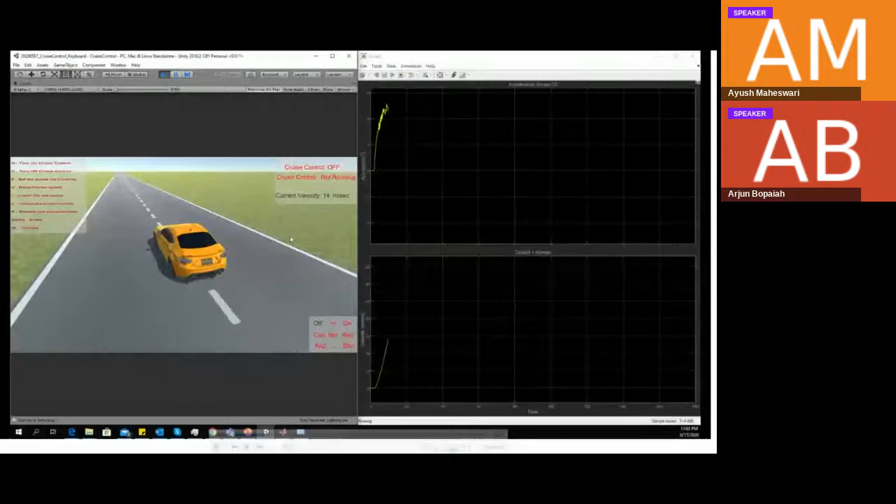At the very beginning, the human drives the vehicle. The controller sets a certain velocity, let's say more than 20 meters per second. This is in the Unity game engine, and the controller is working in MATLAB, with inputs given from the keyboard.

At this velocity, he sets the cruise control system on. As soon as he presses the cruise control system on, you can notice that the vehicle velocity has settled to a reference velocity, which is now 24 meters per second in our case, and the vehicle continues at this velocity as long as the driver doesn't press anything.

Now he can increase the set velocity by pressing set plus plus. You can see here there is a rise in velocity, to 26 meters per second, and now he can still increase the speed by 2 meters per second by pressing set plus plus again.

If he wants to reduce the velocity of the vehicle, he can press set minus. Now the vehicle velocity will be reduced by 1 meter per second, and he can further reduce from 27 to 26 meters per second by pressing set minus.

Now, if he wants to take over control of the CC of the car, he can cancel the CC mode, and then, as you can see, the vehicle is in control of the human. Human can do it, and then he can press resume. As soon as he presses resume, the reference velocity will be the same velocity as before the system got cancelled, so it's 26 meters per second again. It has come back to the same velocity.

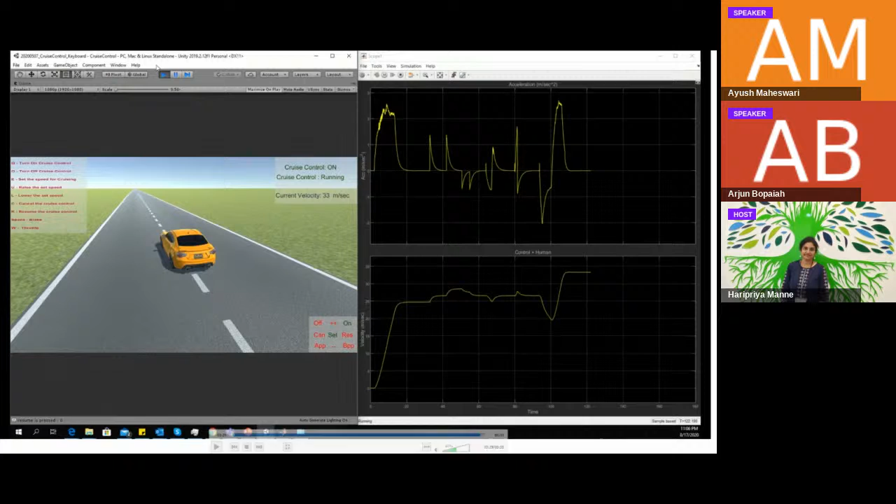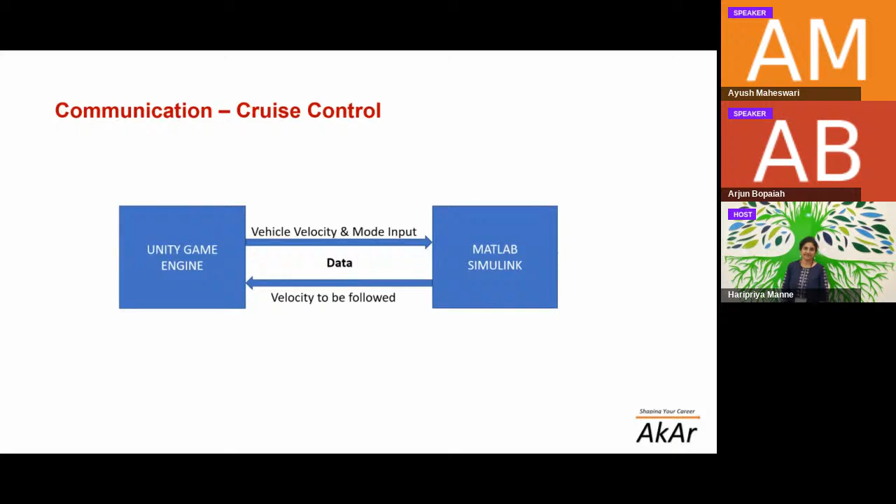So now you can see, you can change these controllers and see the effect, how it will affect the control effect on the plant. Or you can change the plant also, and you can see the specific changes which are performed using the system.

So now comes the last session of the day, which is system engineering and architecture. I believe this will be quite interesting because till now we were completely talking about technical stuff, and this is how ADAS architecture and ADAS systems are developed in the industry. I will be talking about various tools which you should learn if you want to further pursue your career in this industry.

So now we have seen that ADAS is comprised of so many domains, so many verticals, so many particular concepts, so there should be a particular methodology to design this system. I was talking about one cruise control thing, but in a car you have supposedly 5 various ADAS sub-verticals and you have to integrate them. How will you do that?

So we use the system engineering method for that. How should a multidisciplinary system be strategically developed? It should first be developed, tested and validated. And let's talk about why any project fails: either the system is complex, there is an organizational issue, or there is a lack of knowledge.

So there is one non-profit organization called INCOSE, the International Council on Systems Engineering, which has defined the system engineering methods. It has been taken from defense and aerospace, because 20 years ago, defense and aerospace were the only domains where multidisciplinary systems were used. So it is a formalized application of modeling to support system requirements, design, analysis, verification, and validation activities.

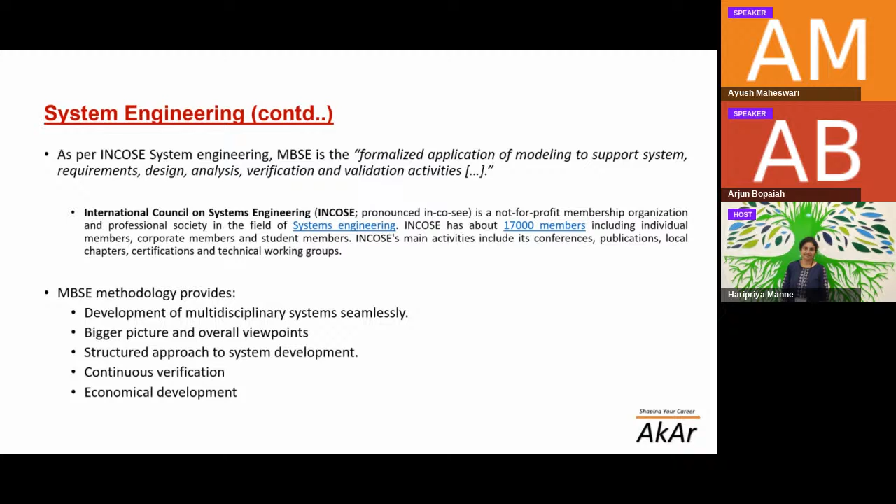It was a very long and very expensive process. But today computation has increased a lot; you have very good computation today. And because of that, you can apply system engineering concepts in the automotive vertical also.

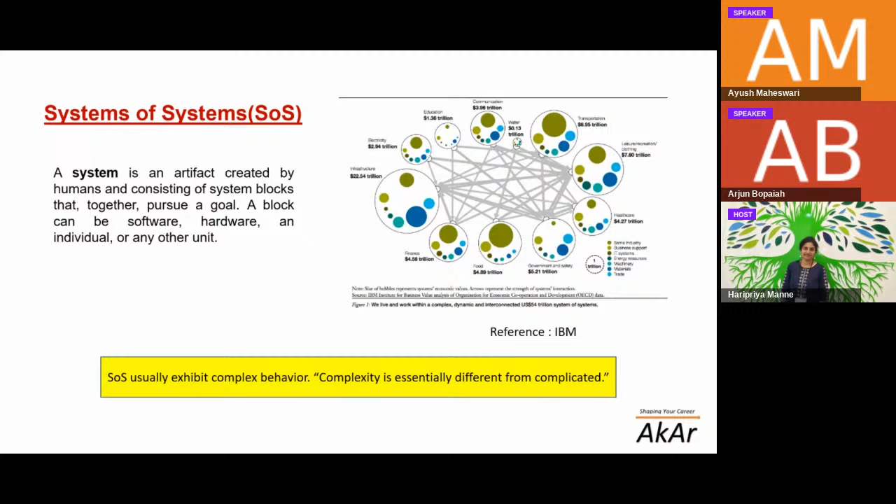So we use a V model methodology. Till now I was talking about the design part, the technical part. But actually how it works in industry is we capture the requirements of the customer, of all the stakeholders. Based on the requirement, I design my system. Then there is an inner V loop inside the V loop.

I design my system, go into detailed design, do virtual testing like the Unity game engine. I repeat it until I feel it's time to deploy. I deploy it, perform particular testing using the deployment. This is where the concept of hardware in the loop comes in. Then I perform the module integration.

There are a lot of companies in India, specifically Mercedes and even Honda, using these systems. A lot of hardware in the loop systems are today developed in India by OEMs or vendor companies to design and verify the system. This concept has been taken from software engineering, and we have a module integration test. Then we have a system subsystem integration test, and once validated, the system is accepted and deployed.

So I will give you one example. I want to design the adaptive cruise control. I will take the requirements from the ISO standards and from the customer. Then I will functionally decompose my requirements into functional requirements and non-functional requirements.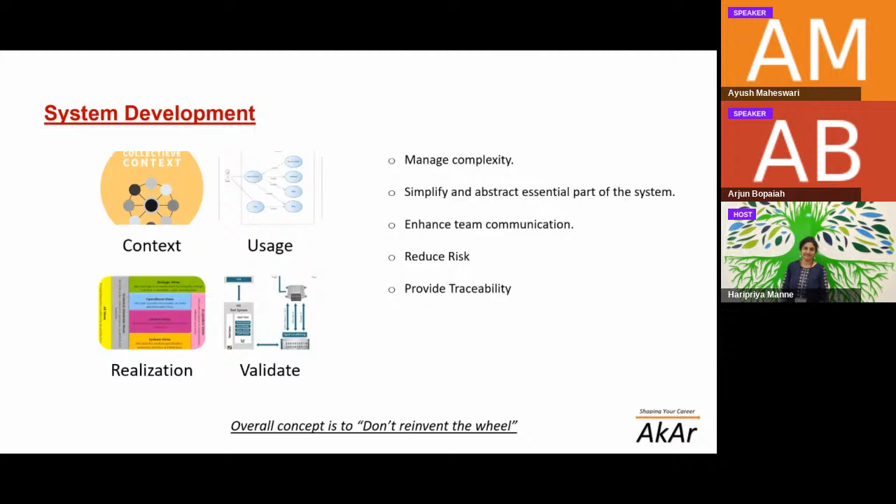And this is quite important. Why real-time operating system? Let's take an example. You are doing testing for an airbag, and now I want my particular output to be delivered in a particular time. It should not take more than that time. That is the work of the real-time operating system. It defines a particular time and the answer will be generated in that particular time itself. Otherwise, if the airbag is activated a bit late, it might cause an accident. So that's why real-time operating system.

Then you have physics engine providers. You have IPG CarMaker. You have VI-grade, which is an Italian-based company. And then you have MATLAB.

So in hardware in the loop, you have a virtual plant and the real controller. In rapid control prototyping, you have a virtual controller and the real plant. So what I can do in the virtual plant and real controller setup is use virtual plant as IPG CarMaker, integrated with MATLAB. And the real controller you can set up yourself using Texas Instrument or NVIDIA or NXP Semiconductor. And then you can change the controller.

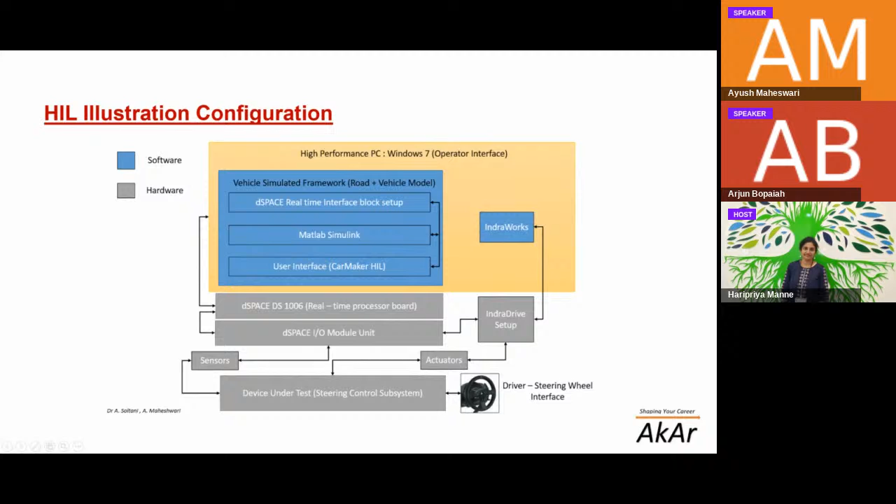So the concept is, first define your project, determine your stakeholders, determine your requirements. Once the requirements are set up, then model the project.

And there is a 1,000-page, 2,000-page document just for this in companies because there are such complex systems. And then the stakeholders, and then the requirements.

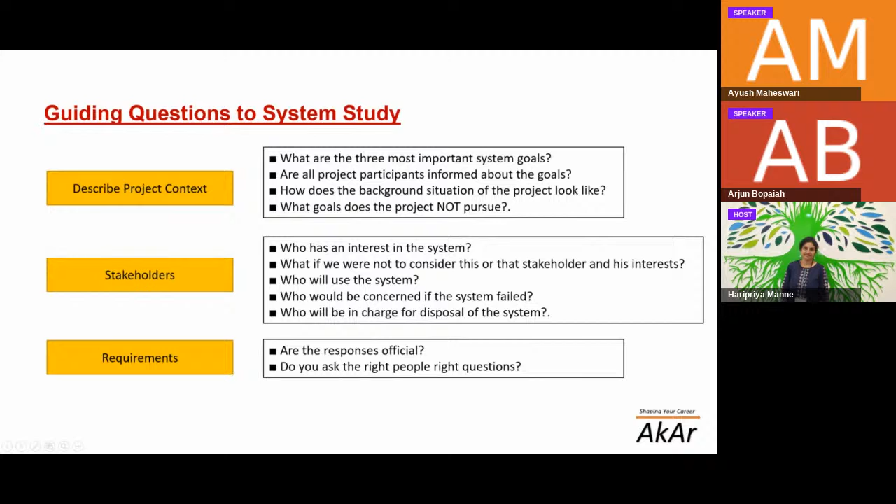During the modeling, calculate the use cases. What Arjun was talking about - what are the possible use cases? How is the customer going to use all the use cases - even the apps you are using, Zomato or Swiggy, they also have developed use cases before designing the software.

Once the use cases are defined, then you have to follow a particular architecture. Once the architecture frameworks are in place - there are different architectures, like DODAF, MODAF, which has been taken from the defense sector. And then there is 4+1 Kruchten, and Zachman.

Then you have to develop a UML diagram and the SysML diagram. This can be done in real time using various software called IBM Rhapsody or Enterprise Architect, and there are real-time open source SysML diagram tools also.

And once that architectural framework is set up, then you have to design your system. It should not be like you are directly starting to design your system - that is not a proper way. Even if some of you here are from Formula Student teams, this should be your process to design the Formula Student car. That's what they look for exactly - are you able to actually cover everything that the customer wants or the stakeholder wants.

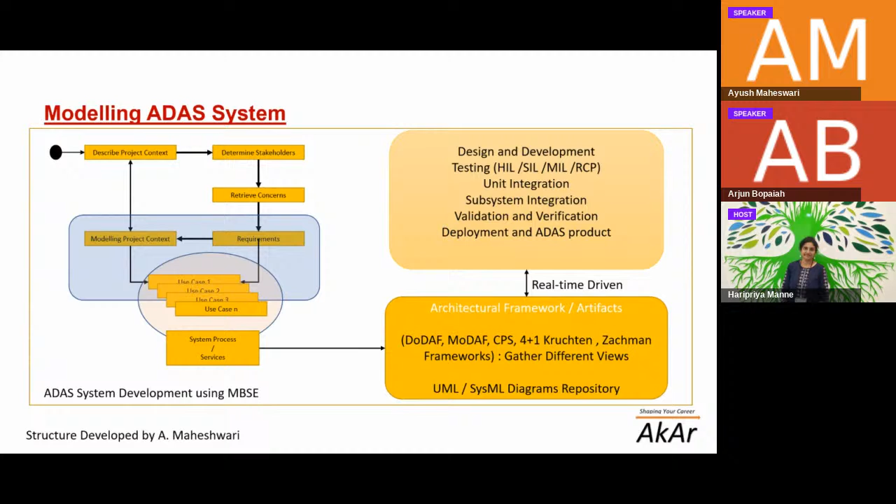And then we have a particular view. Business architecture view is important for the management stakeholder. Data architecture view is important for the data scientist. Application architecture is important for the integration guys. And technology architecture is important for the guys developing the controller and the deployment system. So you have to define these architectures, and they are defined using these languages, UML and SysML.

So that's how our ADAS system is developed. This is a particular diagram from software called Enterprise Architect, developed by Sparx Systems, and you can run it in real time. You can actually integrate it with Simulink using the functional mockup unit and API, and then run it in real time.

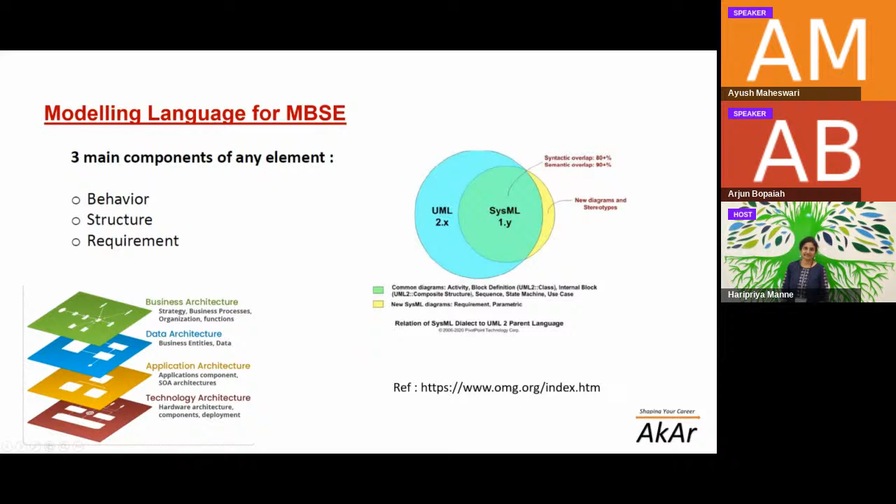So this is actually how the ADAS product looks like - it does not look like code. Everything is behind that; this is how the whole system will look like. And all organizations use this.

You can consider a viewpoint as something like taking an image of a particular mountain. You are standing on the north end, so that's your view. And someone is standing on the south end, that's his or her view. So the view will change depending upon the stakeholder.

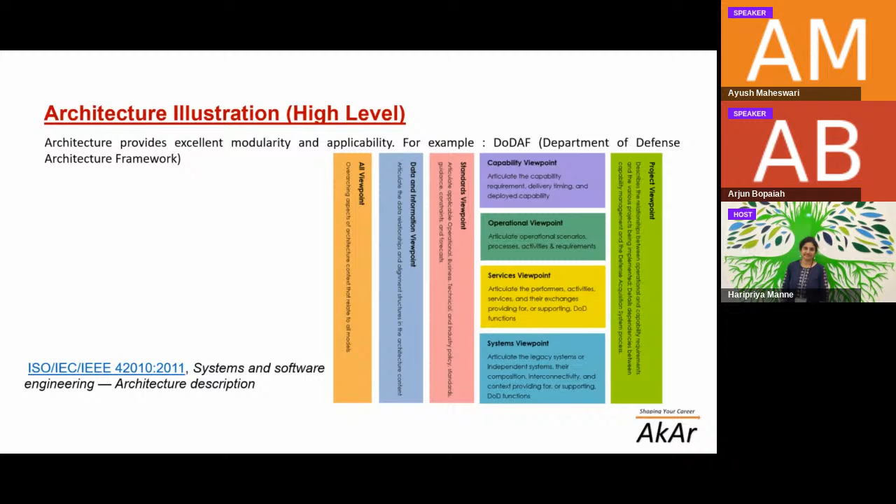Python and TensorFlow are highly used for AI and machine learning. C# is used for the Unity game engine. C++ is specifically used for deployment and development of software code. MATLAB is used for integration purposes and performing testing.

Vector is used for CAN communication. IPG CarMaker is used for physical designing of the engine system and vehicle physics system. DSpace Control Desk is used for rapid control prototyping. ROS is used for communication. AutoWare is an open source platform based on ROS. And then Carla is used for visualization.

So you should know these basic concepts if you want to enter the ADAS development or smart mobility domain, which is quite different from the engineering curriculum I studied during my bachelor's in India. Now things are changing, and you have to understand a completely new perspective.